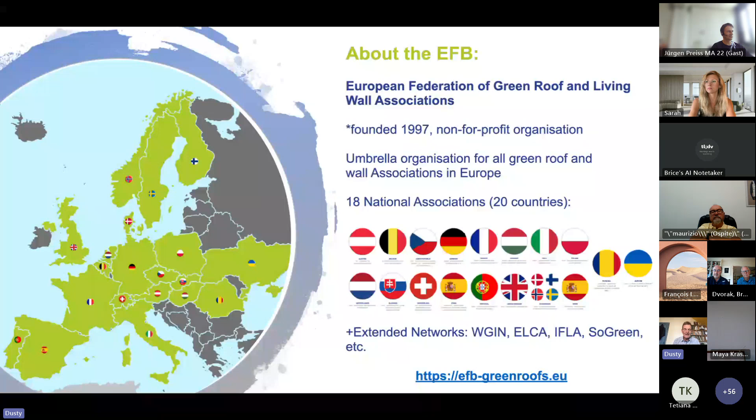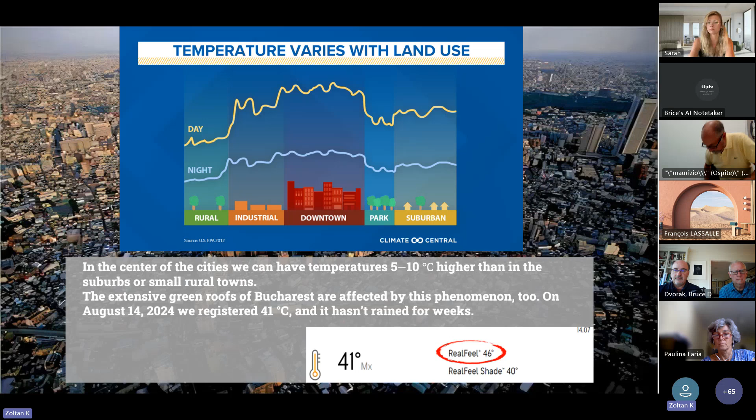To realize this, we have to improve the sustainability of green roofs in different ways, which together result in a resilient green roof. Increasing the depth of substrate to more than 15 centimeters, if possible, is very, very important. But sometimes we don't have such a huge load bearing, 200 kilograms, available in our project, so we have to find other ways to improve water retention — we have to choose a very good, adequate growing medium to solve this problem.

Also, the visible part of our green roof is the vegetation, so the vegetation must be installed in a way to resist even in harsh conditions. One way to improve this resistance is to select native resistant plants.

The most important thing is not to forget that the retained water on the roof is not the same as the available water accessible for the plants. I will return with more details later.

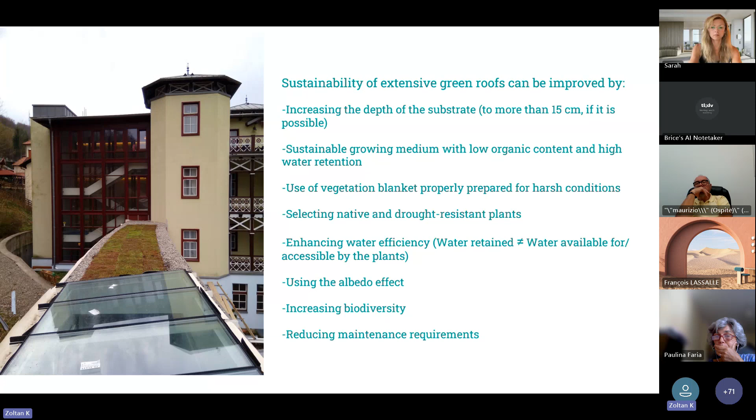It will be a small delay, about 5 seconds to move to the next slide, but soon we are going there.

Usually we don't have the possibility to increase the depth of the substrate. But it's more important to insist to architects to increase the load-bearing capacity of the roofs, because the deeper the substrate is, the better conditions we can create, because as the roots go down into the bottom layers where the temperature is lower and they have access to water, they can resist the stress. Otherwise, the roots will suffer from overheating of the surface.

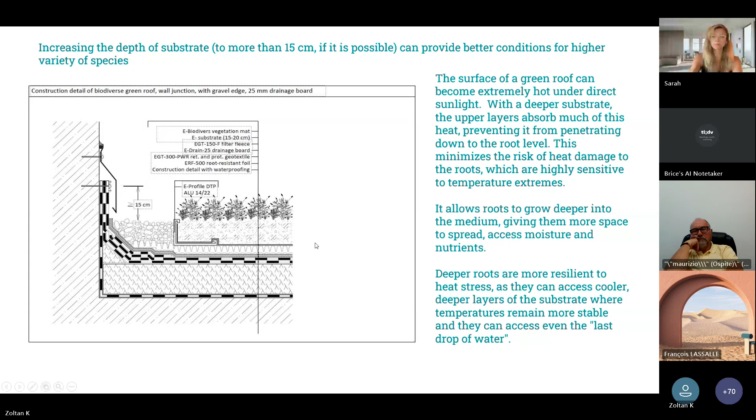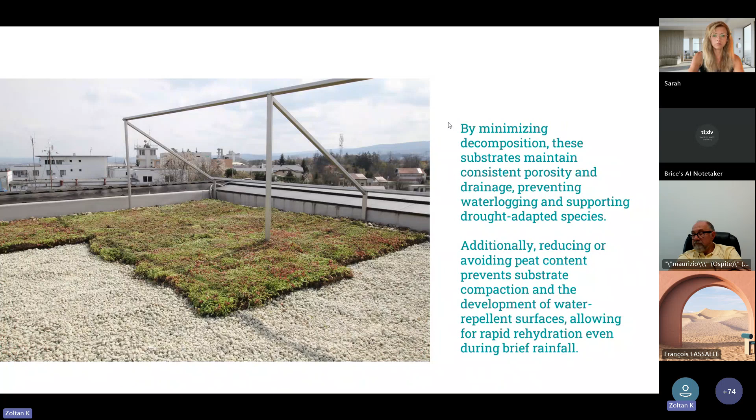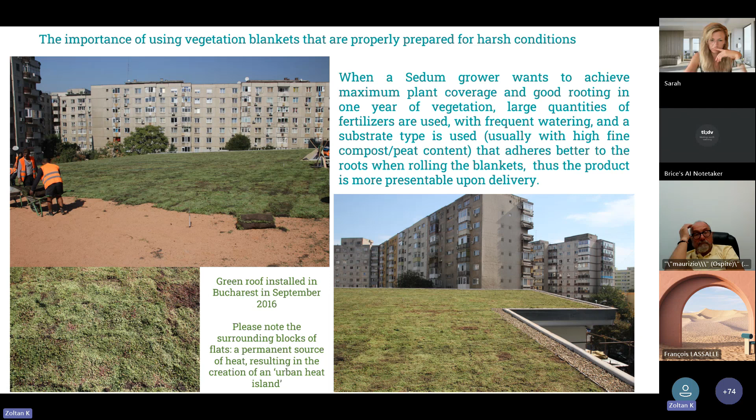The next year, in the summer, the first summer after installation, a surprise appeared. In June, the roof looked beautiful, it was flowering, and after that a very dry period started. That meant temperatures above 41 degrees for a few days, and for 2 months we had no rain. Also in the evening and nighttime, the temperature didn't get below 30 degrees.

So in these conditions, the blankets contracted, and the most viable species, which had been under intensive care in a nursery, disappeared in such a harsh environment. It wasn't prepared for this, and only 1-2 species remained, which strived to repopulate the blanket to get good vegetative coverage again.

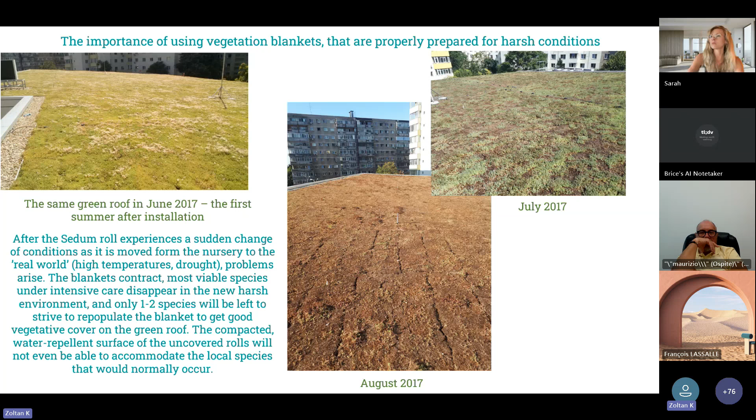Unfortunately, this water repellent surface which appears between the colonies doesn't permit even local species that would normally occur to accommodate there. And after 8 years, the roof is still in very poor condition. You can see some isolated sedum spurium colonies, which are well known to have very deep roots, so they were the only species to survive. Between the colonies, we have uncovered surface where we can observe only moss and very few isolated local herbaceous plants. So what is the solution?

We have to choose the right blanket. Some people can say that it's only characteristic of the agglomerated urban environment, but near the seaside, at the coastal area, where we have very dry winds, high temperatures, and high solar radiation, this type of blanket behaves in the same way and develops into a chessboard-like green roof with low regeneration potential, unfortunately.

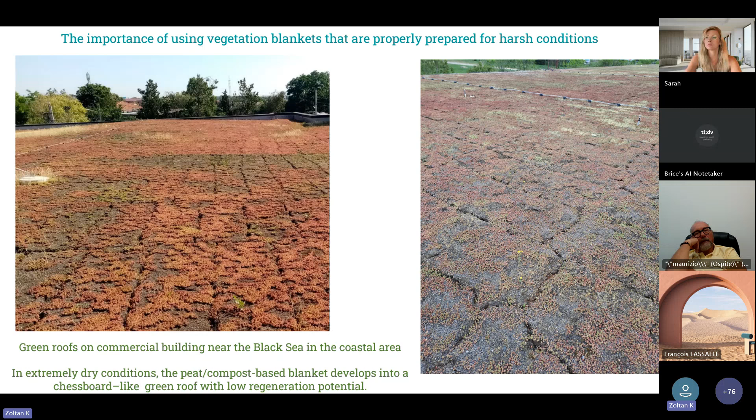So we can avoid this situation if we choose a better vegetation blanket.

The solution could be, as one of our proposals, to use a sedum blanket, which was cultivated mainly in volcanic ash-based substrate with low organic content. Here in the nurseries, in such harsh conditions, full vegetation cover can only be achieved in a few years, from cuttings that have been spread.

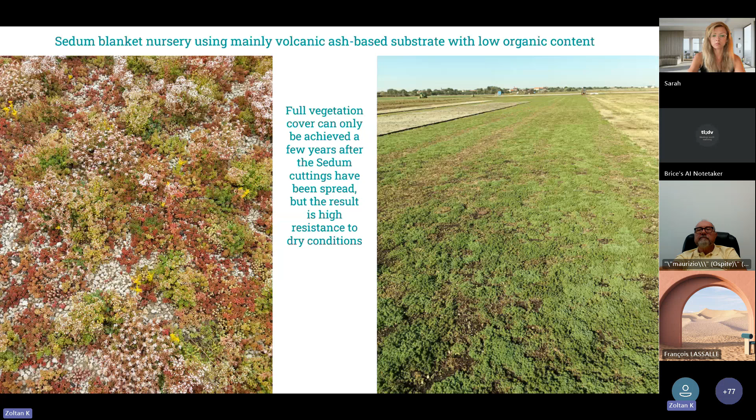But after that we will have no surprise when we put the blanket in dry, harsh environmental conditions. In Arad, we made two huge projects last year where after one year we have no surprise with such a blanket, no shrinkage, no gaps between the installed rolls, and the vegetation coverage is almost the same as when we installed it.

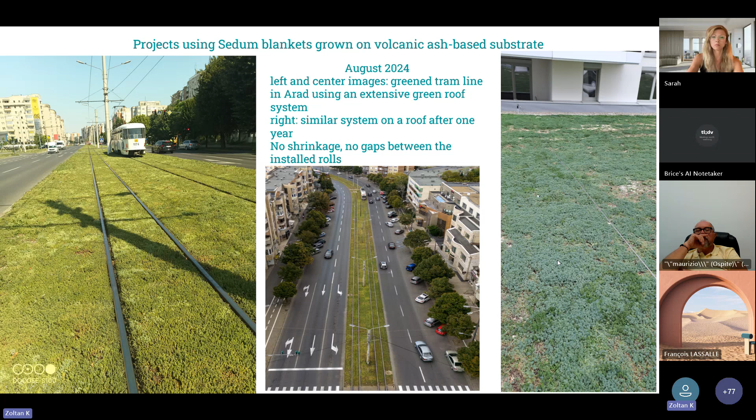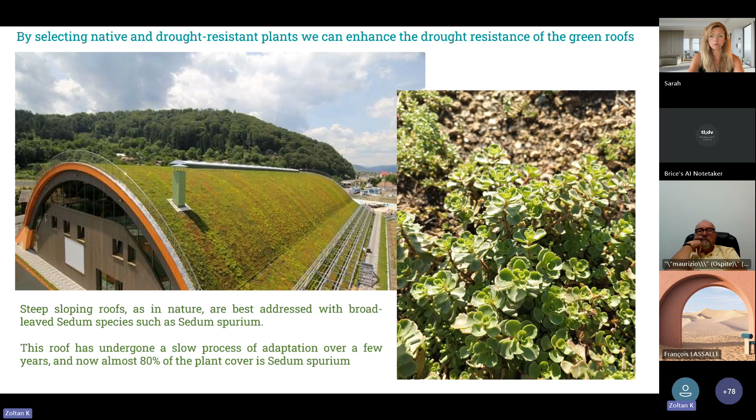Going back to nature, we have to imitate nature and select native drought-resistant plants. Here is a project we made about 7 years ago, and in 7 years the vegetation adapted to those conditions, and only the most resistant plants, like sedum spurium with a deep root system, survived, and now it represents almost 80% of the vegetation coverage.

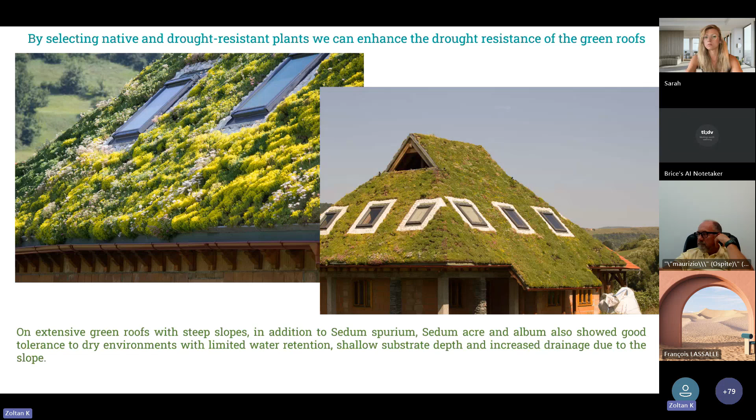Similar high slope green roof, only with a 5 centimeter thick green roof system. Here, beside sedum spurium, also sedum acre and sedum album appear, which are resistant to heat and radiation. Their weakness is not a problem here - they don't support water logging, but in this slope it's not the case.

So we must pay attention to water availability, not just water retention, which is just a statistical figure. If we have architectural limitations that mean we can only install light green roof systems, we have to maximize water retention, if possible, to at least 50% of the saturated roof's weight. For this we have to use new solutions - new drainage and water retention boards.

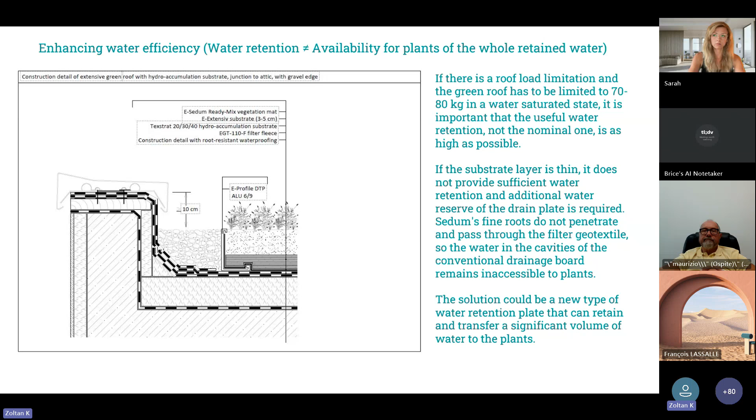Which make accessible the whole retained water. Here you can see a comparison between different types of drainage board.

First of all, on the right two columns, you will see the classical drainage board made of polypropylene or polyethylene with cup-type cavities. Usually these boards retain about 10-15 liters per square meter, but it's not totally available for the plants, because even if these cups are filled with water, if the filter geotextile is stretched over the cavities, there is no connection between the water and the substrate.

So the plant's roots usually don't penetrate the filter geotextile to enter the cavities and absorb water from there. The solution could be another innovative accentuated hydroaccumulation board made of recycled polypropylene threads, which can retain almost 10 liters per square meter for every centimeter of thickness.

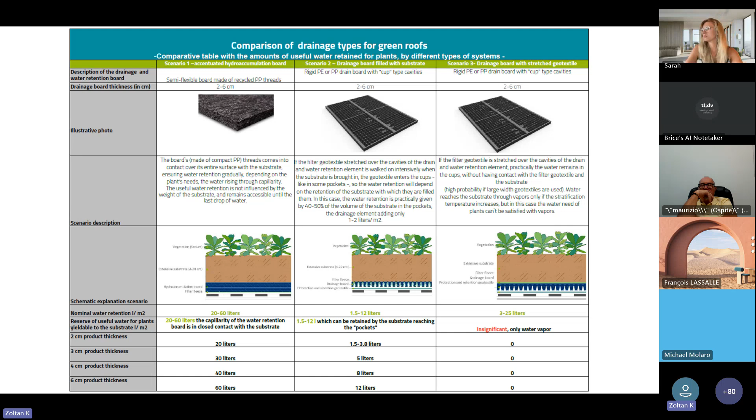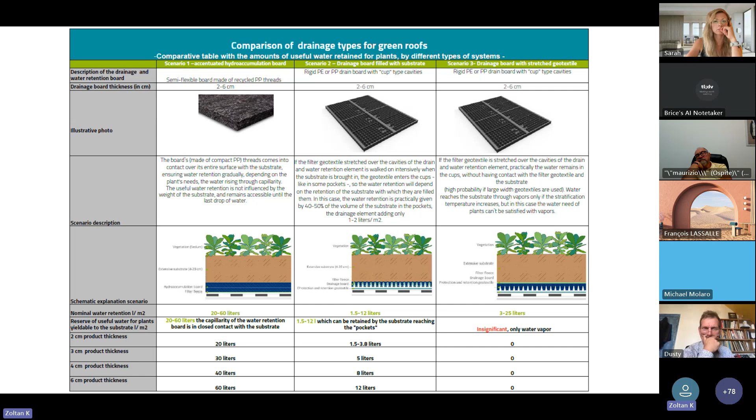And the best characteristic of it is that it's able to transfer this whole water quantity to the substrate through capillarity, because it's in contact with the substrate across its complete surface. Also, if we install herbaceous deep-root plants, these deep roots can penetrate this board and access the last drop of water.

So this is very, very important - to set up a system which permits the plant to absorb the last drop of water. In this way we can minimize the substrate height, because it's partially replaced by this drainage board, which can also act like an artificial substrate, permitting the roots to penetrate and grow in it.

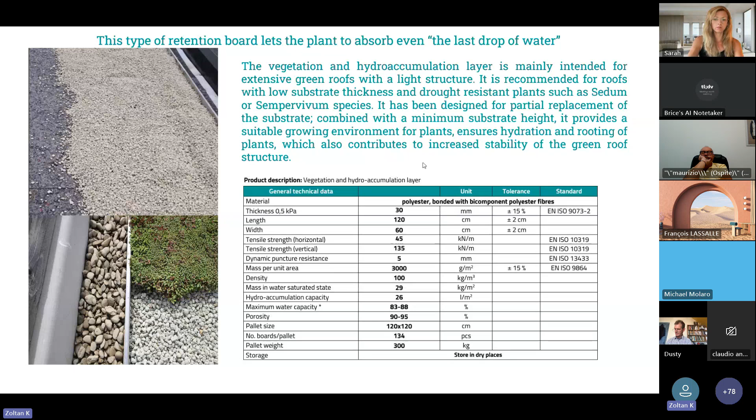Yes, okay, I'm quick, the essence was told. So with this type of system we can cover things like bus shelters, metal structures where we have limited load-bearing capacity. Also in a 5-6 centimeter green roof, we can obtain water retention of 40 liters or more. This will be enough for sedum, and sometimes local herbaceous plants appear here.

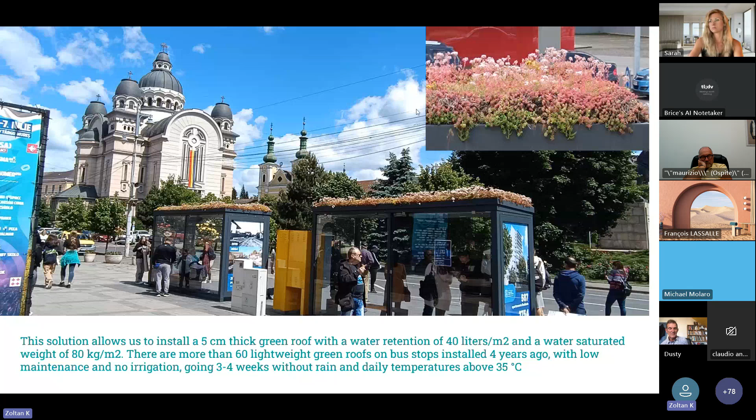Another possibility - if the green roof is installed through cuttings using a white volcanic substrate, the albedo effect can protect the young plants against overheating and sun radiation.

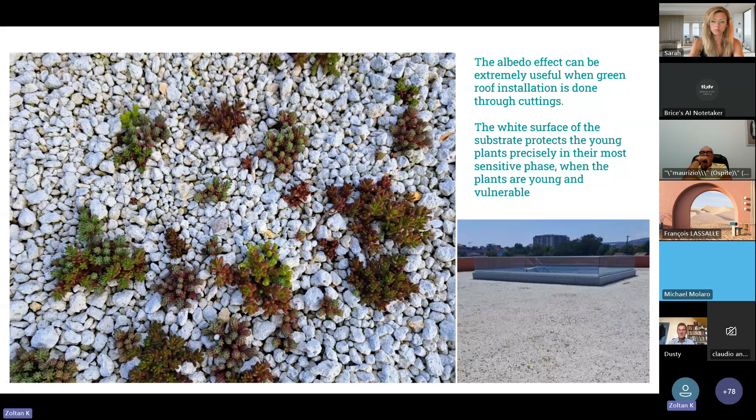It's important to enrich these green roofs with local plants. Deep-rooted herbaceous plants can provide shelter for other plants, and if we put around 60-70 different species on the roof, every time, in every conditions, we will get 20-30 plants which will survive in those conditions.

Here are some proposals, but I recommend that every one of you go and check the surroundings where you installed a green roof, and look for dry, sandy, rocky areas, and check what kind of plants survive there, like 10 or more than 10 years ago, Dusty in United Kingdom with blueweed - he transformed the roofs of London.

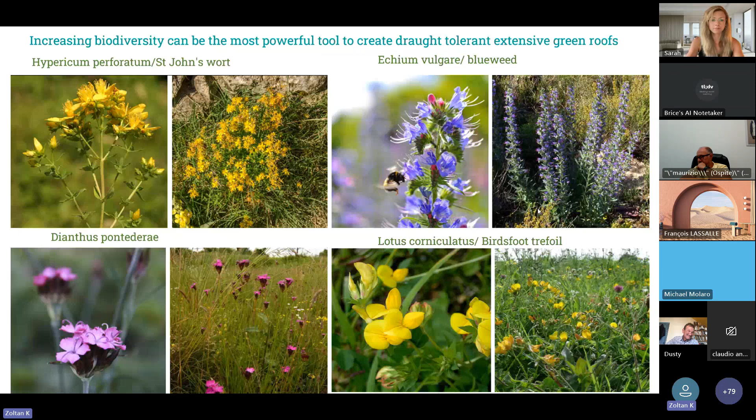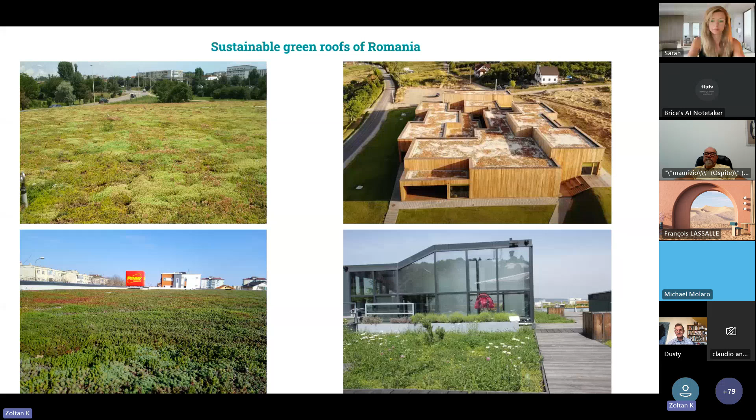So I'm finished my presentation. Here you have a small overview about a few sustainable green roofs of Romania. I'm waiting for your questions in the Q&A session, and thank you for your attention.

Okay, thanks very much, Zoltan. I think a key point there is, for me, I'm Northern European, is that we've got a lot to learn from the South, and that'll come up when Maurizio's here, because roofs are struggling. I was in Berlin last year, and it's normally 80 to 100 mil in Germany. They're now talking about having to increase it in Germany because of droughts. So that's a little comment from me.

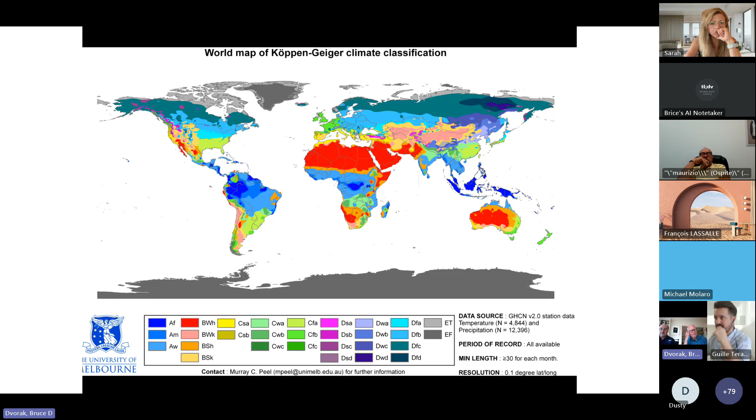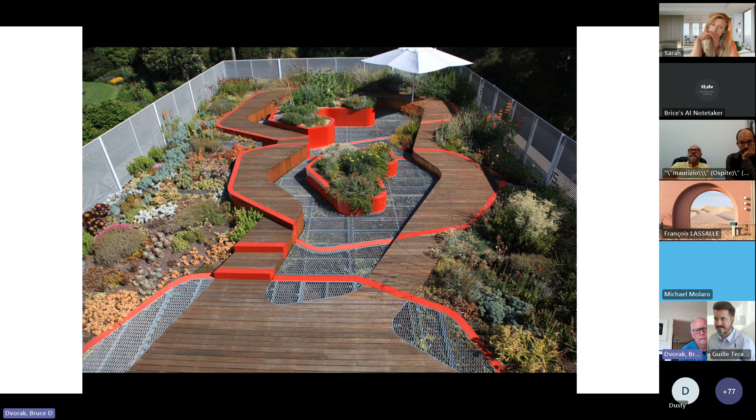It's very important to do this in every region and over a longitudinal time frame, because it takes years sometimes to understand how these plants will react. So this is essential. I'll share this, their guide of 15 years of experience. So folks that get the presentation can go on, or you can just search Burnley Green Roof Plant Guide and you'll navigate to it.

So I think some general principles: the green roof market really internationally evolved in a climate where things were very easy to grow in. So that kind of sedum blanket worked everywhere in Holland and the wetter part of Germany and England. And then as it grew as an industry, I think we've got more challenges. We go into harder climates, and additionally one of the challenges is the green roof market, at least in the US, was kind of taken over by roofing companies, and plant people weren't really involved as much. So it became part of a roofing system, and we need to get plant people more involved.

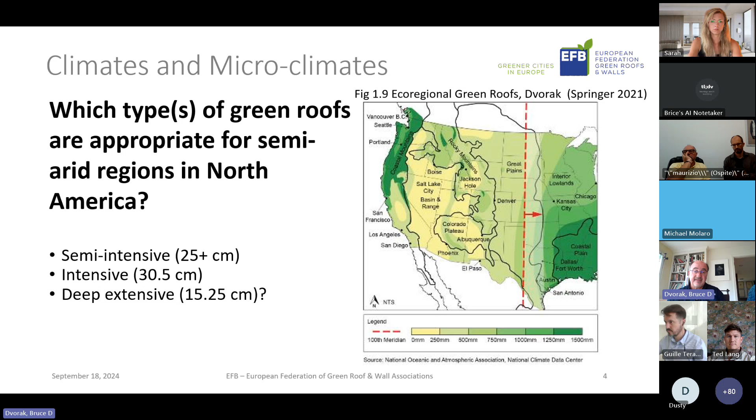Okay, so there's some good research out there. Dr. Jeremy Lundholm published a paper many years ago called Habitat Templates—the idea of looking at nature, getting outside, looking in your own backyard or region to see which plants are adapted to that hot, dry region.

So this idea of looking at nature as a place to find plant communities—I think there are analogs in almost any kind of climate. They may get quite a bit of rain every year, but it's still a dry condition. Okay, so the substrate is the depth and the type, as has been mentioned before.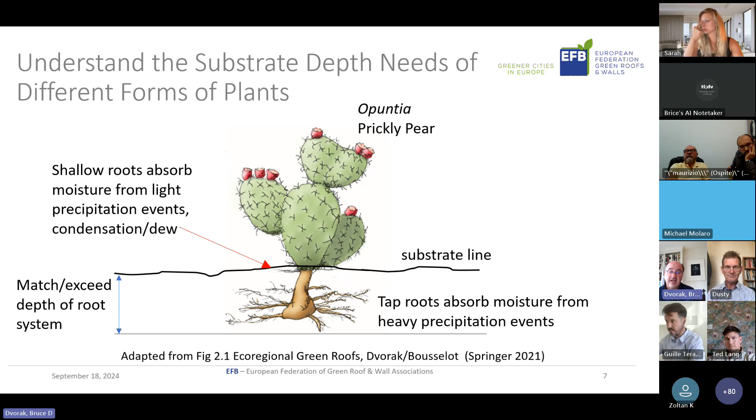So this plant is very tough. I've tried it in many different environments in Texas, even in an 11-inch substrate with no irrigation. I've had prickly pear survive through the summers. It grows out in cap rock environments, very shallow soils, rock all around. It heats up, so it's a very hot environment, but the plants are out there. It's just mimicking the substrate and drainage characteristics that will make the plant happy there. If you put this on a flat roof with poor drainage, it's probably not going to last very long. So the plant needs to be happy, you need to mimic that environment.

Which is the next point: when you select your plant, you have to match the roof deck environment. So if you're given a flat roof, you might have to say, well, which plants are going to thrive in that condition, a low slope where the water's not going to move fast when it rains hard? So maybe it could be a mesic condition. If the roof is sloping, has a decent slope, 3%, 4%, then the water is going to move through, you might have a different set of challenges but you may not have standing water in places, so you want to select plants that will adapt to that.

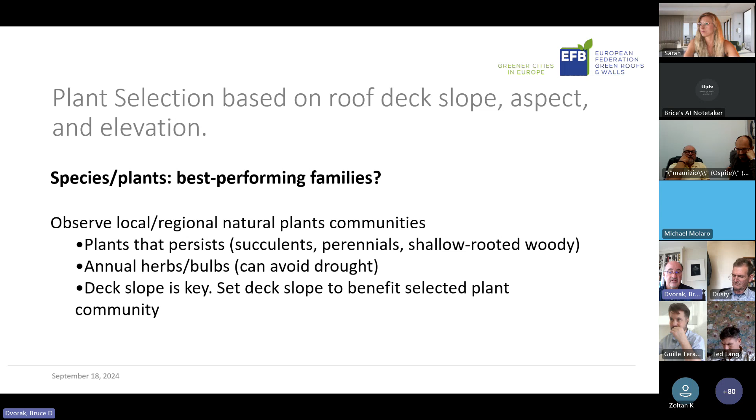As Ed mentioned before, there are other plant choices you can make other than perennials. Looking at annuals, bulbs, there are many bulbs that can bloom at different times of the year, or maybe they're just dormant. There are rain lilies that grow in Texas. They sit dormant for the whole year, but in the middle of June, when an erratic storm comes through and it rains, they might pop up if the conditions are right. So there are a lot of different ways of getting color and biodiversity onto a rooftop.

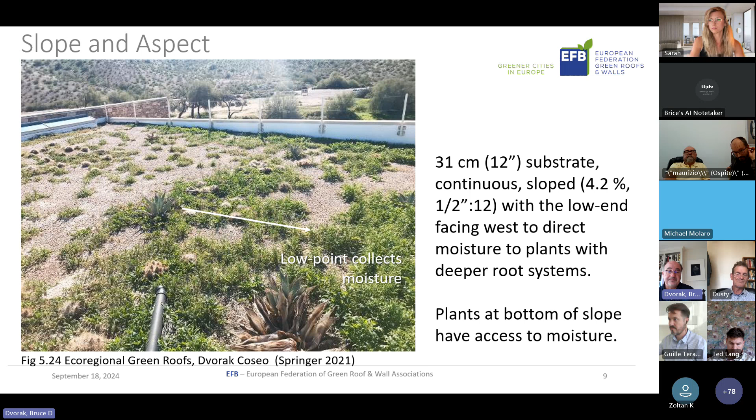Okay, so the big question is about irrigation. I know some parts of Europe or even parts of North America may not need irrigation because there's reliable rainfall during the summer, even distribution, and you can select plants for that. But in Texas and parts of the West, if there's very little precipitation and it's hot and dry for months on end, there may need to be some source of water.

So there are sustainable sources of water for green roofs: things such as harvested water from rooftops, gray water, which includes water from sinks inside buildings, faucets, or other sources. If there's a natural source of water nearby, that can also be used as well.

Since the media is very dry—I think Ed or somebody mentioned this earlier—you might want to deliver that water lower into the substrate, not on top. Typically with spray irrigation you're going to get evaporation as the water moves through. I've seen many different applications, some on top with drip, some below with drip. It's really based on the plant choice and how the whole green roof is set up. You might have multiple short deliveries of water as opposed to one long time.

Okay, a couple examples that are in the book: Heron's Head, this is on the left, that's in the San Francisco area.

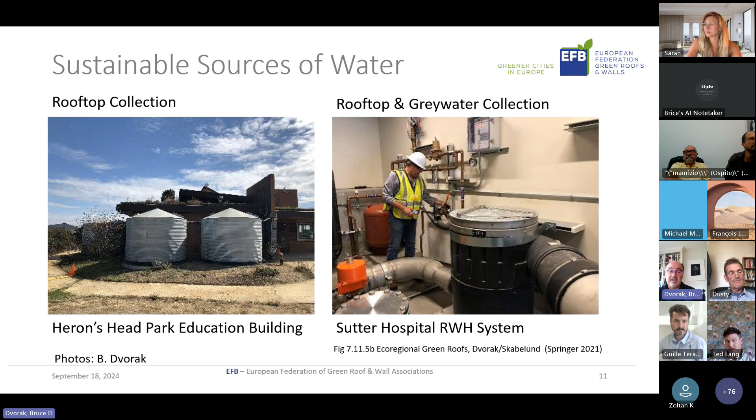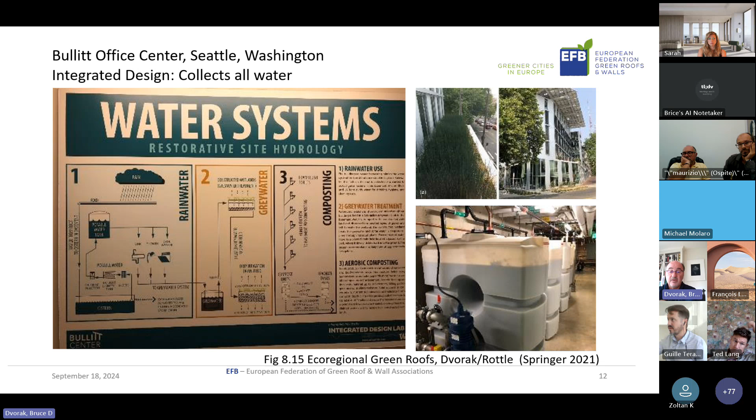So all of the sinks, the toilets, the shower, the dishwasher, all that water is collected internal to the building, and they use that water pumped up through a sand filter, a solar filter, then up to the green roof to take out the nitrogen and whatever nutrients might be in the soil. From there it goes to a rain garden down below, and the water percolates into the ground. So it's a complete loop, a complete cycle there.

These mesic environments, which can be very applicable to green roofs - those plants can tolerate drought, and they can also tolerate being flooded temporarily. So there's some good guidance out there just by looking at the type of plant communities that are present.

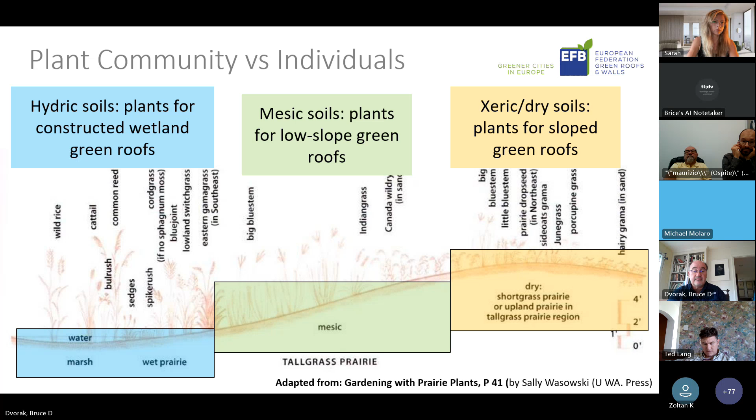Trying to navigate. Here we go. Okay, semi-arid climates.

Yeah, so just here's a little more repetition on some things I mentioned before. How am I doing with time, Dusty? I have a couple more minutes. All right.

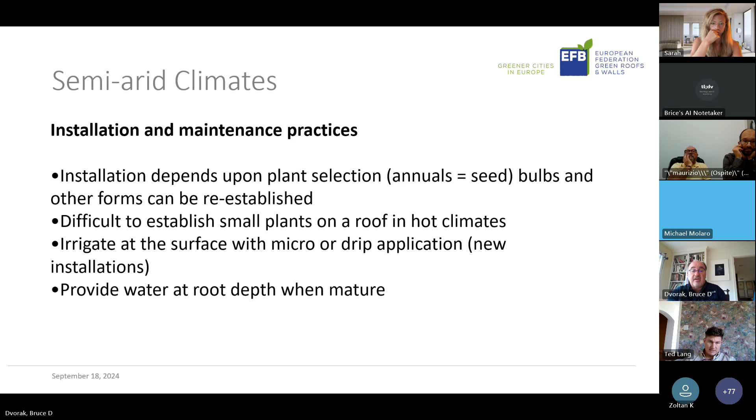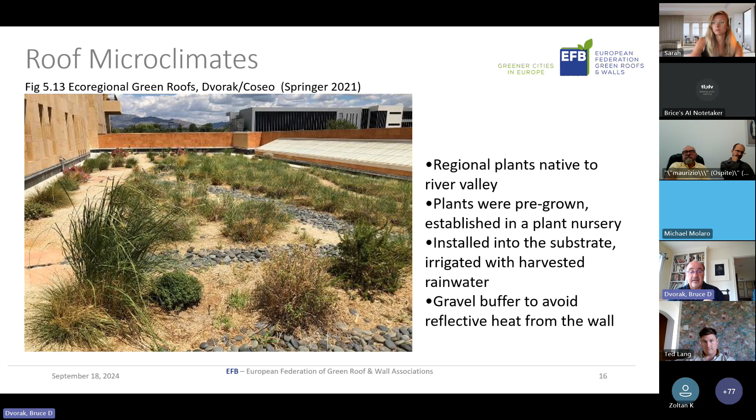Thank you, Dusty. Okay, now I try to find the presentation. Yeah, can you see the presentation? Yep, can see it. Okay.

Thank you, Dusty. I'm sorry for two things. One is my English, very poor, so I hope you can understand what I'm saying. The second is, despite the nice presentation you have seen now, my presentation is really not with very nice pictures - I try to concentrate on technical things, so sorry if I will be boring a little bit.

But as Dusty said, I would like to focus on available water, which for us is really an item, especially from the physiologist's point of view. You see on the left the Walter-Lieth diagram - there are two German researchers, I hope you know this graph. They put in this graph the average monthly rain for some years, and also the temperature. The red line is the temperature, and the temperature can be written as the evapotranspiration rate.

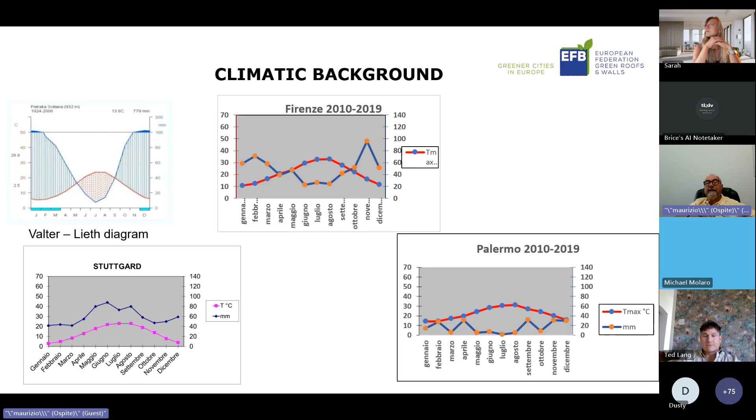So you see the big difference between the continental weather and the Mediterranean and semi-arid conditions. It is clear from this graph, from our point of view, that we have to irrigate - at the state of the art of our knowledge, we have to irrigate in our climate, at least for part of the year, not always, but part of the year. So the general consideration is we have to irrigate; the question then is how and how much we have to irrigate - that's the question we're asking ourselves. So which are the main factors to consider? For sure, the vegetation water needs - as Bruce said, we have to consider the vegetation type we use.

So which is the type of vegetation, and then which is the best solution. Then of course from that is the water availability. Staying on the description stage, the substrate thickness is another important factor, because the temperature of the substrate is a big factor. Compared to a natural soil on the ground, on the ground you always have some humidity growing up.

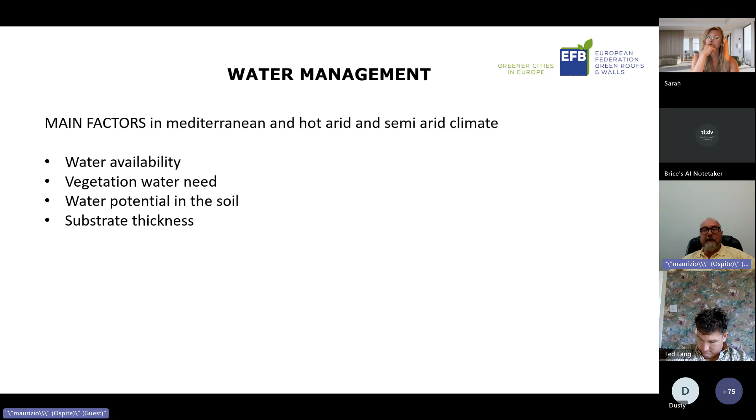It is the pressure, the strength that we have to apply to take out the water from the substrate, and this is on the vertical axis. On the horizontal axis, we have the water content in percentage, from 0 on the left, growing toward the right. The potential is normally considered as negative, so it goes from the bottom to the top.

I would like to compare a clay soil with a sandy soil. The clay soil is this yellow line, and the sandy is the blue line. In the middle is a substrate, but we will take it afterwards. The withering point is the point at which conventionally the plants cannot absorb the water anymore.

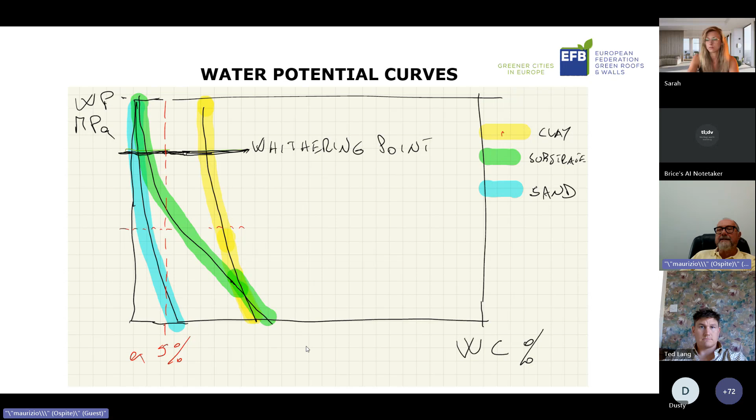In a sandy soil, if you have a lot of water, like in a continental area, the sandy soil is not good because it cannot keep the water. So this is just an extreme example to show how important water is in a substrate. So the main consideration is water availability: when you have low rain rates, it's higher in sandy soil than in clayey soil.

And the same concept can be used for the thickness of the substrate. What we have seen, and we have made a publication with the University of Trieste with a plant physiologist, is that when you have a low thickness substrate, a small rain in percentage carries a lot of water, and in a higher thickness substrate, the same quantity of water is really not significant.

So there is some vegetation that we realized lives better in a low thickness substrate than in high thickness, when you don't want to irrigate a lot. So the idea is to create a substrate, or use soil, that can maximize water availability, of course excluding the free water range.

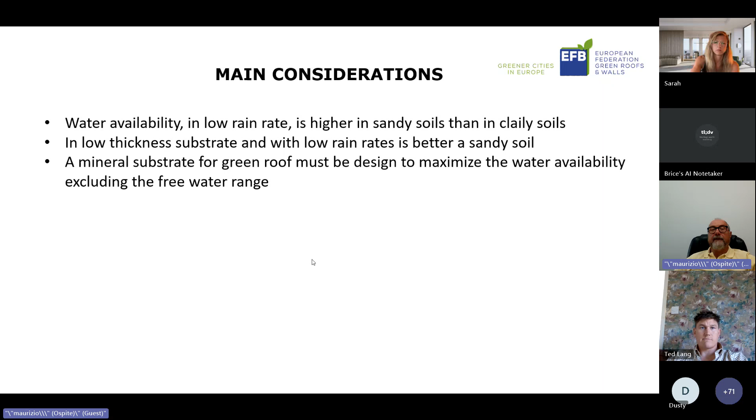I will explain what we mean by free water. These are some pictures of our laboratory and university tests made some years ago. We started from 4 centimeters of substrate. Then, as Dusty said, in Italy we made a norm in 2007, later revised in 2015.

It's really created for our climate, and it is really a performance norm. Honestly speaking, we started from the FLL norm, but we modified it, adapting it to the Mediterranean climate.

Just one sentence: for a natural soil, it's impossible to fulfill the requirements of a substrate. And this is the graph of the water potential curve. On the horizontal axis you have decreasing water content, and on the vertical axis you have the pressure, the strength you need to take over the water.

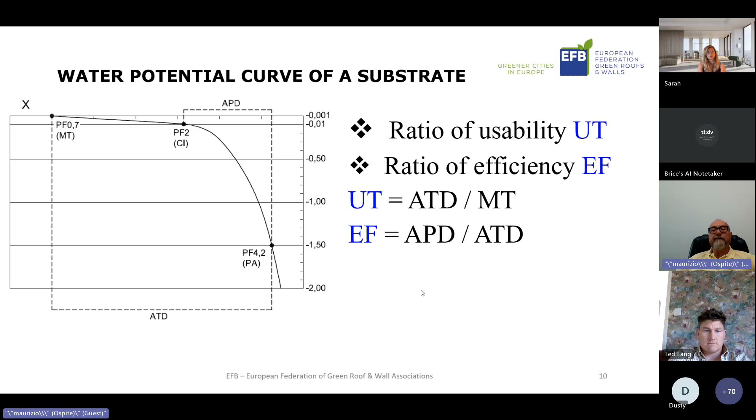What about sedum? Okay, sedum is everywhere. You have a lot of species everywhere - 2,000 species, if I'm not wrong. So you can find it locally.

So you can use sedum everywhere, but don't forget that sedum needs, at least in the Mediterranean area, maintenance - you have to pick up the weeds that arrive. And in any case, you have to irrigate just a little bit, because we have seen that high substrate temperature and a lot of irrigation are in favor of the weeds.

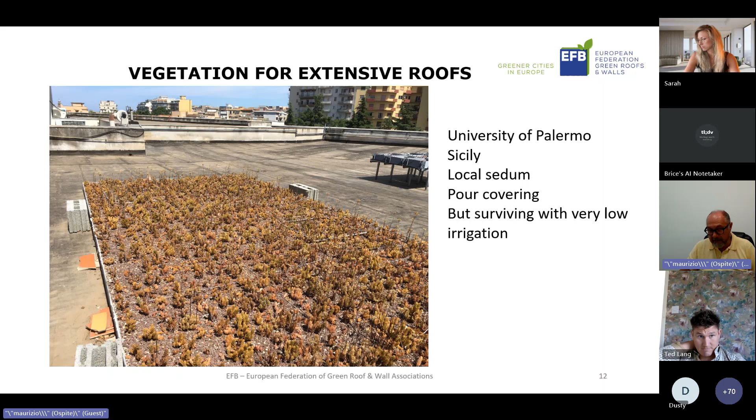Okay, thank you. I hope I could explain this difficult concept in a certain way.

Maybe Dusty, you can explain a little bit too. Okay, thank you very much. If you could stop sharing the screen, Maurizio, that'd be cool.

So what Maurizio didn't cover is how they actually irrigate - within that gradient. So they don't over irrigate, they irrigate just to keep the plant available water at the right level. I think I'm correct in saying that, Maurizio.

I've got quite a few videos about plant available water coming, because I spent a week with Maurizio talking about this. My view is, for everybody north of the Mediterranean, and probably a lot of places in the United States and Canada, is that the approach in Italy is something we need to learn about in the north because of climate change.

Now we've got a few questions. I can't see any questions in the chat, I don't know whether my chat box has failed me. Mineral wool substrates are recommended as an option to store a lot of water. I'm not going to comment on that, but I know wool was used in Switzerland and in the UK, and it's very good at retaining water. My concern there is plant available water.

There's a lot of discussion about biochar. Both Brice and Ted mentioned Melbourne, Burnley, where they looked at biochar. Biochar isn't always very good at giving plants the water - it keeps it, and you have to have high grade biochar.